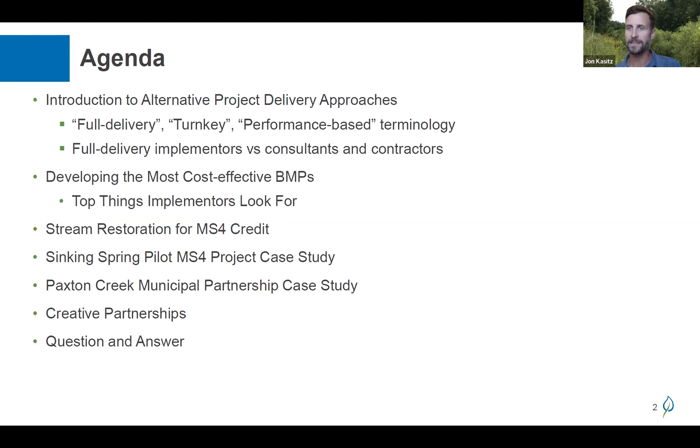So, project delivery methods - again, maybe an atypical place to start this conversation, but when it really comes down to the cost of compliance, this is the way to save money getting MS4 compliance, when factoring in the life cycle of the BMP in the project, and really guaranteeing and fixing the cost of MS4 compliance, ensuring it's as low as possible as folks are procuring or chasing the funding for these projects.

This is starting to happen in Western and Eastern Pennsylvania. It's been around a bit more in the Chesapeake Bay watershed - the idea of stormwater taxes, stormwater fees, stormwater authorities. Folks are starting to really wrap their heads around MS4 being, on a 5-year permit cycle, a multi-million-dollar regulatory compliance burden. Our goal with our customers is to figure out how to satisfy that regulatory compliance burden as cost effectively as possible and reduce risk and liability for the folks who are paying for this work, which is all of us on the call here.

If you're looking at PennDOT and their MS4 permit responsibilities, we're paying for that through our gasoline taxes, through our other state and federal taxes. At a municipal level, I suspect some of you on the call are probably currently paying stormwater fees and stormwater taxes. So if we can collectively as an industry reduce the cost of compliance while getting good projects in the ground, it's really going to benefit all of us in society by reducing the cost of this emerging area of municipal regulatory compliance.

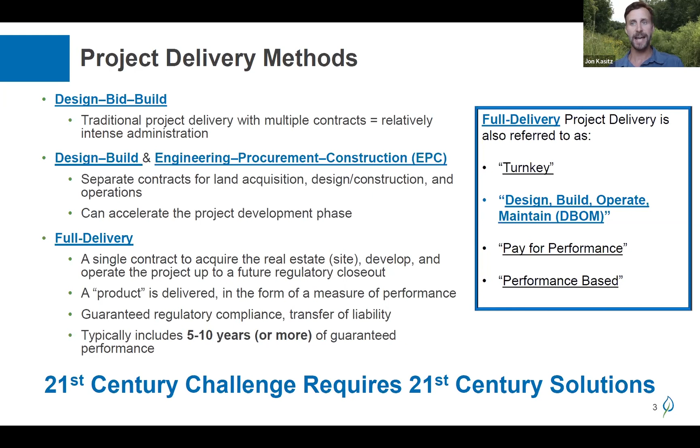So we're not fretting about a storm coming up when I've got a stream restoration project halfway through construction. If that gets blown out, I'm looking at a $100,000 change order to the contractor going through traditional procurement. So not to dwell on this, but that really is, in my opinion, the special sauce to get these projects done to satisfy MS4 compliance as cost effectively as possible.

Are you hiring a consultant to do that? Who's really accountable at the end of the day for this work being done, guaranteeing that's going to get done as cost effectively as possible, and putting themselves on the line to deliver for a fixed upfront cost? This is really what full delivery gets you, from A to Z for a complicated 5 to 10 year long project, with one entity accountable for delivering that at the lowest possible cost. Honestly, if things pop up during construction, it's on that company, on us as the implementer, to figure it out.

I'm always trying to craft how I communicate what we do, but here's a new way of trying this. We as a company have done, I think, over 60 miles of stream restoration, 400 acres of wetland restoration across the state, and literally thousands of acres under active management, conservation, and preservation easements. We've done over $250 million of wetland, stream, and natural resource restoration with zero change orders. And that's pretty cool to be able to say.

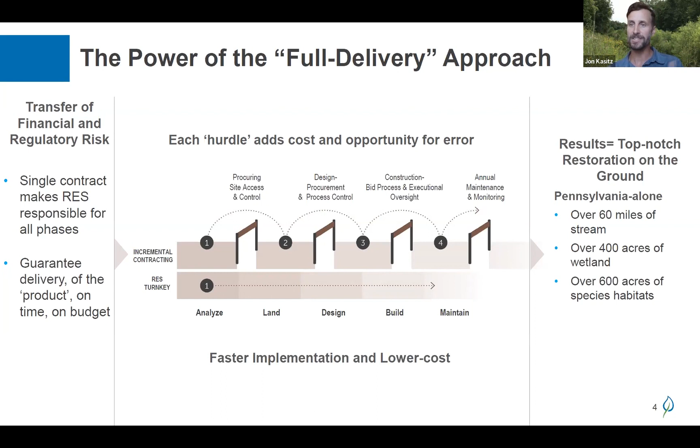Again, this isn't about anything special about Hannah or myself. It's really this full delivery implementation industry that's been the catalyst driving that phenomenal success of getting really good work in the ground, better, faster, and cheaper, by doing it a bit differently through full delivery or design, build, operate, maintain contracting. And this is nothing actually new within the industries we operate in as a company.

In the compensatory mitigation world, the consultants on the call are probably aware of wetland stream mitigation. That's how our company cut our teeth in Pennsylvania, through wetland stream mitigation banking, turnkey offsite mitigation for the Southern Beltway, the Shell Cracker plant, the Pittsburgh International Airport commercial expansions, and PennDOT districts 11, 12, and 10. This is how we cut our teeth doing these stream and wetland restoration projects.

The cool thing was we just took those lessons learned and skill sets, along with external consultants and contractors working with us and for us, and applied that full delivery approach to things like environmental lawsuits, where someone made a mistake during construction and bad stuff happened that impacted wetlands and streams. We can use full delivery to commoditize that into, hey, you need 5, 10, 20, 100 acres of wetland restoration to address that environmental lawsuit or PADEP consent order.

We can put that into fixed unit-based pricing, go find sites, design, build, operate, maintain, and implement, and we're oftentimes on the hook with the regulators to satisfy that litigant's — I'm not an attorney, but maybe the plaintiff is the right term — compliance responsibilities. Obviously, today we're talking mostly about water quality and stormwater offsets.

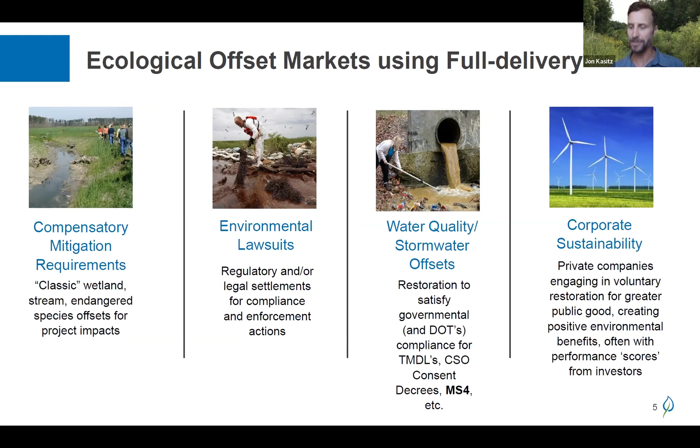Hannah, I'll quickly run through these because you're the technical expert. I am not, but I'll let you take it over with the next slides, and you just give me a heads up or a nod, and I'll click through the next things.

When we have initial conversations with our customers and other stakeholders involved in these MS4 projects, we're often probing a little bit on what you're looking for and what you think you need to satisfy MS4 compliance when trying to find the best potential sites. What's the scope of the work? Are you looking just for a design and engineering firm that can design stream restoration projects? Looking for a construction company? Are you looking for a native plant nursery to provide trees and shrubs and do riparian buffer plantings? All those are good things. So we're often trying to decipher with our customers what's the scope of what you're looking for, and where can we provide the most value.

We're going to talk about public and private land. A lot of folks try to identify projects as quickly as possible. If you're looking at MS4 potential BMPs, stream BMPs, the immediate go-to is, well, where can I find some streams to restore in the township park, the county park, public land? We do projects on public land, and that can work sometimes if they're the best location to do the most cost-effective project. Conversely, maybe you want to consider private land, or really just consider public and private land, with the goal being finding the most cost-effective and sustainable project site that will reduce as much as possible the cost of MS4 compliance.

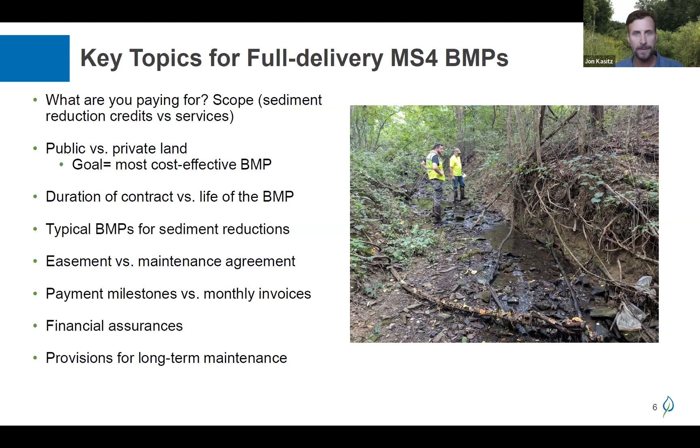So Hannah, I'm going to pitch it over to you, and I'll follow along as you go through, and I'll click through the slides. Sure, yeah. So I'll get into the nitty gritty of how we site these projects and how it's different from other projects.

Not every stream is apples to apples in terms of what is and isn't cost effective, what is a high-producing stream. We have found across the board that stream and floodplain restoration is the most cost effective way to do this if you're looking at substantial needs for reductions.

I won't go through too much of this, but like Jon said, sometimes just because you have a public park with a stream on it doesn't mean that's going to score out to be a good project in terms of the reductions and gain you get. A lot of the typical projects done involve minor bank work or intense armoring to protect buildings and facilities - those either do not count or are unlikely to count for much, so they're not a very cost-effective approach.

Especially since, as Jon went into in depth, this is a project that requires maintenance basically in perpetuity. Stream BMPs are good for that because if they're done correctly with a floodplain approach, they're basically a low to no maintenance system.

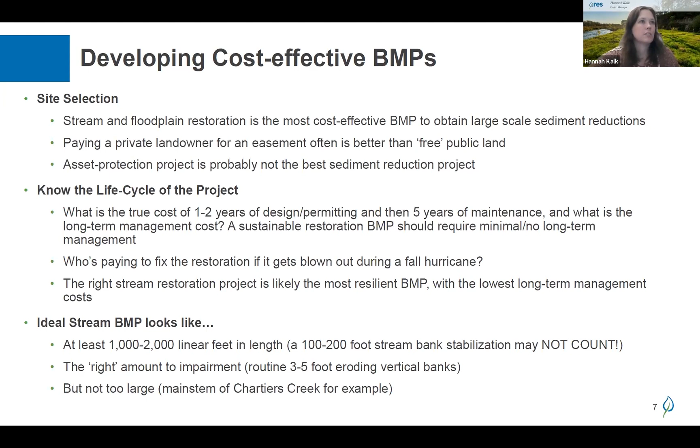Hannah, I think you got yourself on mute. Hey, can you hear me? Yep, good, yeah.

I'll jump into the regulation component of this in a second too.

Got a question from Corey - what size drainage area is typical for your ideal sites? It depends. In urban areas, as you guys know, it can be very difficult to measure drainage area because stormwater is such a huge driver. We like to keep it under a square mile in terms of the cheapest builds, but that being said, if you've got a really, really good site, there can be benefits to working on larger streams too.

So the biggest thing is knowing the regulations behind what is and isn't creditable with the Clean Water Bureau, DEP. There are many different variables, different approaches to calculating your original loading requirements, and that plays into different approaches to calculating your credit or benefit from a site. I'll go into these next.

John, if you want to go to the next slide. And Hannah, I'll go to the next slide here in a minute, but just quickly - what is the right team for the entire project life cycle?

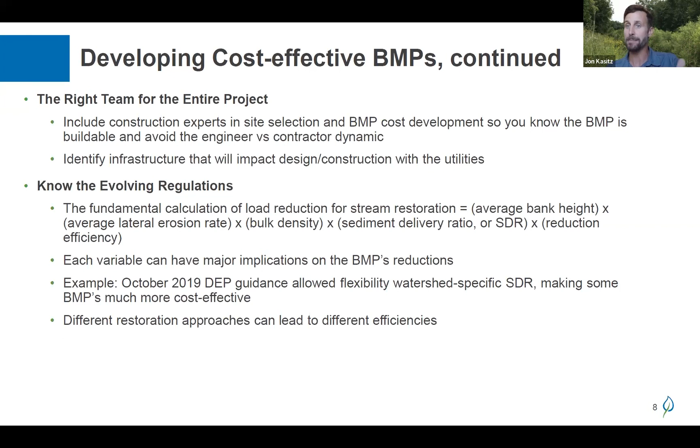In terms of a little bit of background on the regulatory framework, most of you, it sounds like, are with municipalities or work regularly with municipalities. Any MS4 permit holder in PA within the Chesapeake Bay or within an impaired water with a TMDL has sediment reduction goals or pollutant reduction goals, nitrogen and phosphorus.

So as a component of your pollutant reduction planning, you have existing loading calculations that you have to do to determine what the goal for the permit cycle will be, and that's kind of step one in determining how you site a stream BMP.

So I think that's just a point we wanted to raise, is that when you start thinking about this as an option, you need to take a look at how your loading counts were done.

If you use the simplified method, which is a little less work up front, you're being directed by Clean Water Bureau to use the Chesapeake Bay Expert Panel Protocols, which are methods and guidance documents for determining site-specific loading. So you actually have to get more data on the back end about your BMP you're proposing. But it also helps guide you through what kind of credit this particular site could provide.

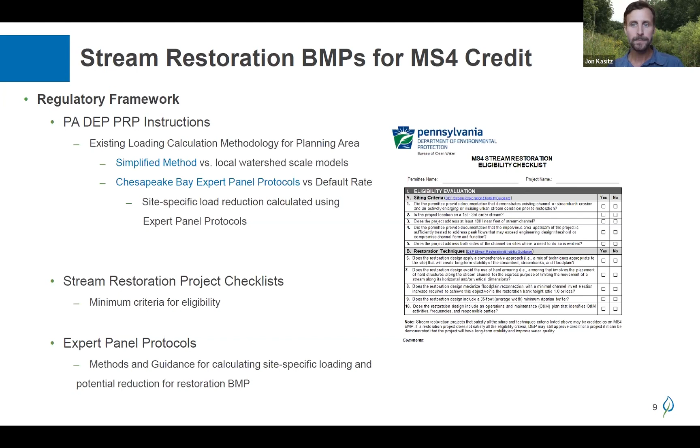Yeah, so I'm going to dive into, hopefully it's not too boring, a little nitty-gritty on the expert panel protocols. There are a series of these protocols that have been published, and they continue to update them, that provide guidance specific to the Chesapeake Bay, but they're also being applied in Pennsylvania outside of the Chesapeake Bay, to help you determine the site-specific loading. So the exact amount of material, an estimate of the exact amount of material coming off a site annually as a result of erosion, but then also to determine what credit the site should have for whatever your pollutant of concern is.

And so there's a number of them. We'll focus on protocol 1 today because that's the one that's really sensitive to how you pick your sites and where you pick them. And that is aimed at direct stabilization of sediment from in-stream sources, so eroding banks.

When you're trying to find a good MS4 site, it's got to be a bad stream - I interchange good and bad. So what you're looking for is over-widened, deeply incised, ideally in that sort of higher range of drainage area in your watershed. You want it to have very little bank protection. You don't want it to be well vegetated. You need to be able to document active erosion on the site.

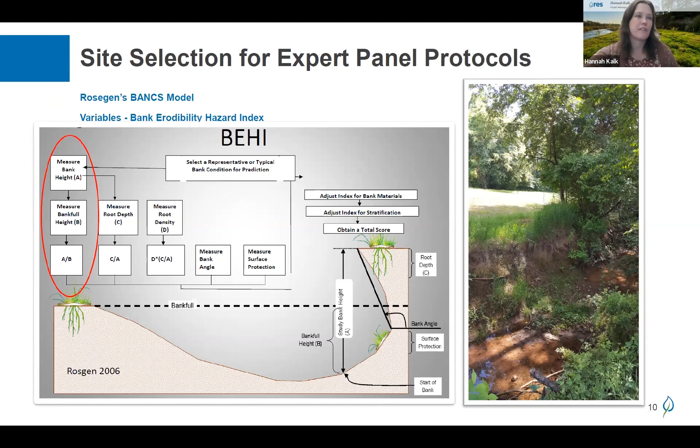The other variable when you're trying to come up with those erosion rates is near bank stress, which is effectively which bank is getting the stress in a bankfull flooding event. Ideally, you want your thalweg, the deepest part of your stream, to be right in the center, so that you don't have any water attacking your banks. But most of the streams that you're looking at, you're going to have one bank or the other as you get these super highly eroded areas with all the near bank stress. So there's different methods for looking at that. You've got to be sure whoever you have doing this work is qualified and familiar with the protocols.

I think the quick analogy I'll use here is you don't have to do all this effort on the front end to assess these potential BMP locations. But again, in our experience, being the ones on the hook to deliver 1 million pounds of sediment reduction for $1.95 a pound for the next 5 to 10, 15 years, we have to do these to really develop cost-effective projects that we can kind of guarantee we can do. And the quick analogy is, sometimes it makes a heck of a lot of sense to spend a nickel to save a dollar.

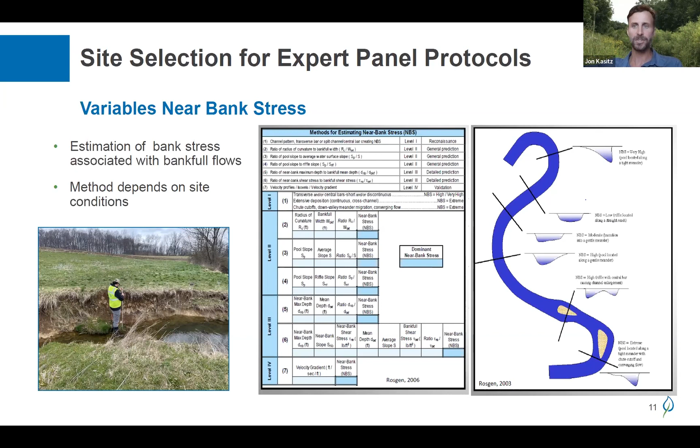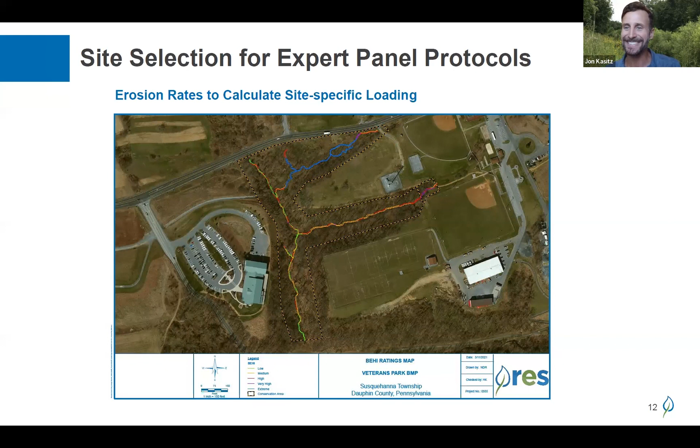And you have to be able to provide this level of documentation if you're going to be requesting credit above a certain efficiency. So this is standard for what we would recommend - if you're going to do the work, you should get credit for it.

If you're really interested, there are all of these checklist documents for the expert panel protocols. If you're going to try and show eligibility under the different protocols, you have to jump through the hoops to provide the adequate documentation to do that. So what that means is a lot of data up front and a lot of data on the back end. But if you do that, then you can actually claim above the standard efficiency. So typically, you would only be able to claim 50% efficiency.

And so there's pros and cons to doing this. If you don't have to, and you're happy with 115 pounds per foot, and you don't have a substantial need, then you can go that route with a normal eligibility checklist. But this is definitely the way to go for anybody in the other camp.

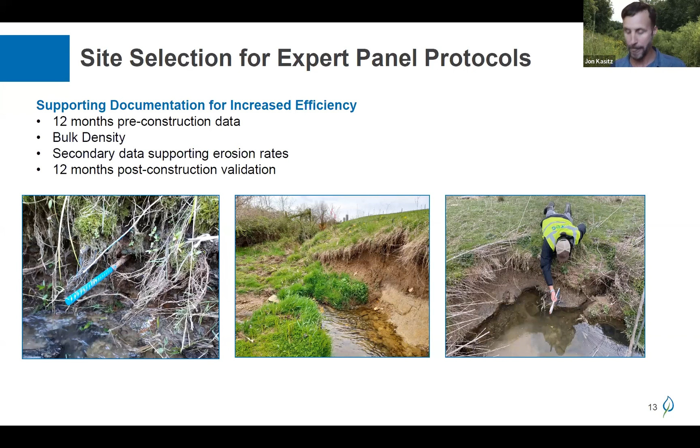All right, what are we talking about doing? Some of you are probably familiar with natural channel design. Some of you may know this by other names - we call it floodplain restoration. The DEP calls it legacy sediment removal projects. What we propose to do is tear off the Band-Aid and fix the source of the impairment. So we're looking for streams impaired by legacy sediments - essentially valleys filled in with sediment after all the trees were cut and the soil washed down.

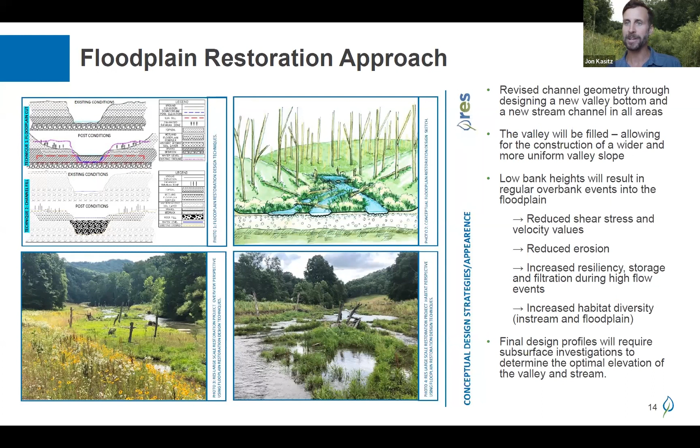Obviously the picture here in the valley is in southwestern Washington County. If everyone had this much room to work within, it'd probably be really easy for engineers to design these projects through floodplain restoration. We all have to live with the site constraints within these project sites, existing utilities. Our sites in the Harrisburg area, we've got some leaking sewers contributing excess nutrients to our wetlands, that the wetlands are also kind of sucking up. So there's all of that stuff that has to get factored into the design process, but really, especially in the site selection process, to see which design approach will work at that particular location to generate the most pounds of sediment reduction.

So I'm going to, how about we pause here? Is there any Q&A we want to address right now before we dive into some more? Yeah, there are several questions, Jon, if we want to. How about we'll start at the bottom? Maybe I'll address Barbara's questions first.

Do we work on brownfield sites? Yes, maybe sometimes. If you're working on a contaminated site, you've now got a new dilemma of what to do with contaminated material, working in and around and dealing with it. That can make things more expensive than an HOA subdivision's natural stream or the ag field type stream restoration projects. So definitely can, however, you need to factor in what the additional cost is if there's potential contaminants, again, keeping your staff safe from an EHS standpoint during construction. Do you use HAZWOPER training because you're dealing with contaminated materials? So it definitely can be considered, but it brings some other liabilities, and liabilities are cost.

What we work with, we don't actually physically work for the Southwestern Pennsylvania Commission. This is just kind of a training opportunity with SPC. I'm not sure that really answers your question, but we certainly work with all kinds of individuals, universities. We've had some really neat collaborative case studies.

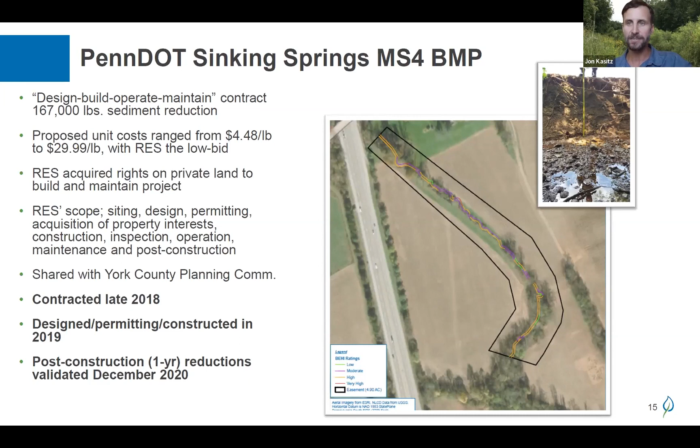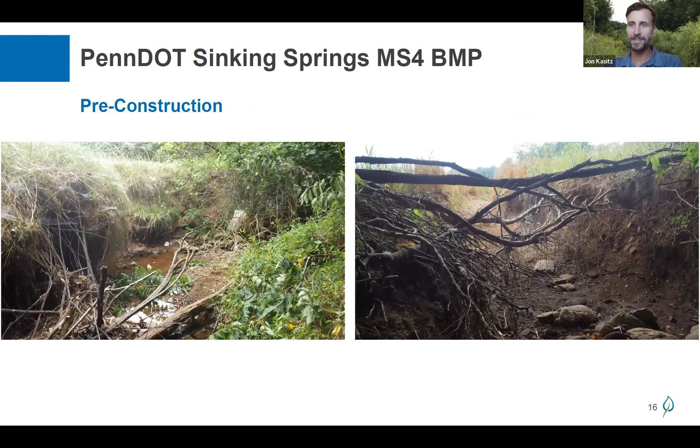Pre-construction, these are very similar impaired Pennsylvania streams, with 2, 3, 4 foot high vertical eroding banks contributing hundreds of thousands of pounds of sediment. Those eroding stream banks are the source of impairment, the pollutant we're really trying to address with all these methodologies that Hannah described.

You take that 2 to 4 foot high raw eroding stream bank, and post-construction there's a 2 to 3 inch high stream bank with E&S matting and stabilization grasses. By April 2020, four months later in the first growing season, those 2 to 4 foot high raw eroding banks are now 1 to 2 inches and fully vegetated. You've removed all of that sediment loading potential from the landscape. That's where the sediment reduction comes from—removing the stream banks and the opportunity for stream bank erosion within the project footprint.

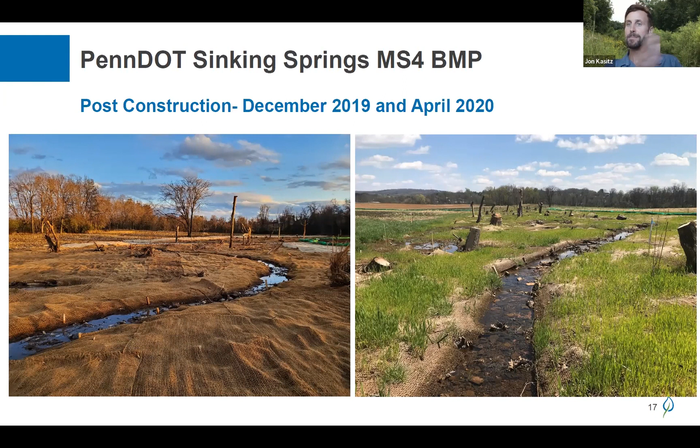Immediately post-construction, then four months later, then a year later, the wetland trees are really growing in and becoming more established. These banks have nothing left to erode. Using pre- and post-construction data and BEHI data collection, the sediment reduction efficiency at this location was over 99%, because you went from raw eroding banks to basically zero stream banks, all fully vegetated.

The picture on the right is just after a hurricane came through in September 2021. That's I-83 in the background, a major stormwater contributor to the top of this project site. A few days after that storm, zero damage. We take these things seriously too—if a site is damaged, we're out there fixing it on our own dime.

So there's a lot of good work in the ground that gives us confidence we build it one time and we're not coming back to build it again. I didn't get a picture from this year—I'll need to get one for my next presentation.

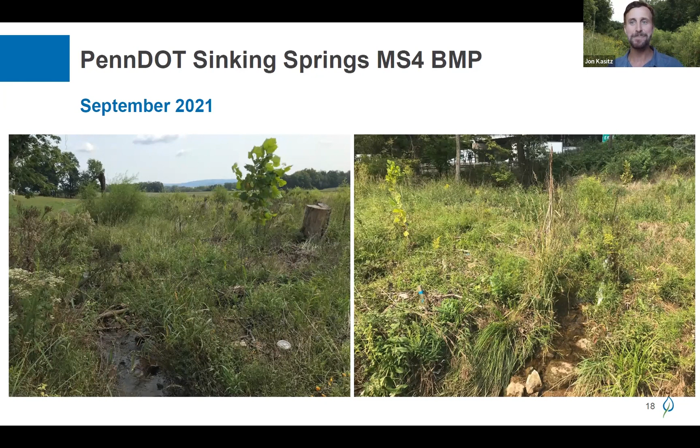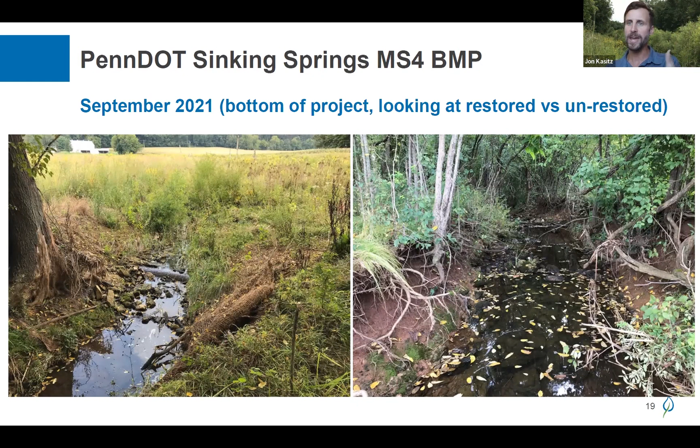This is the very bottom of that restoration project, looking upstream on the left into beautiful lush wetlands, then turning around to look directly downstream at unrestored stream, which is what the majority of this project looked like originally. Hannah and our team are actually working on a permit application right now to complete the restoration downstream, building out the rest of the project, which will include almost a mile of stream restoration. That portion isn't an MS4 BMP—we're doing it for another customer who needs a wetland stream restoration project, but it lets us co-locate multiple projects at one location and maximize the watershed benefits.

Another unique PennDOT-led opportunity starts to tap into municipal partnerships. Paxton Creek includes several municipalities, but the majority is in Lower Paxton Township and Susquehanna Township, draining to the City of Harrisburg, where Capital Region Water is the local utility running their MS4 program. Those three municipalities, with HRG as their consultant, deserve credit for good planning—they had already developed a joint PRP to collaborate, share resources, and share the implementation of projects.

It'd be hard to quantify the financial benefit of those three entities banding together under a joint PRP, but it probably is in the hundreds of thousands, if not millions of dollars over the long term by collaborating together at the outset, just with those three municipalities.

The really cool thing was they layered PennDOT on top of that as a fourth partner on this project. Again, competitively bid, we got 3 or 4 bids from folks like ourselves, ranging from $3.49 a pound to $12.77 a pound. Our first bid was $4.48 a pound. We sharpen our pencil, we learn, we know how to do this stuff better, and we're now down to $3.49 a pound. This is what competition does amongst qualified entities, it drives down costs for everyone as folks like us really need to get more competitive as we're looking for project sites to implement.

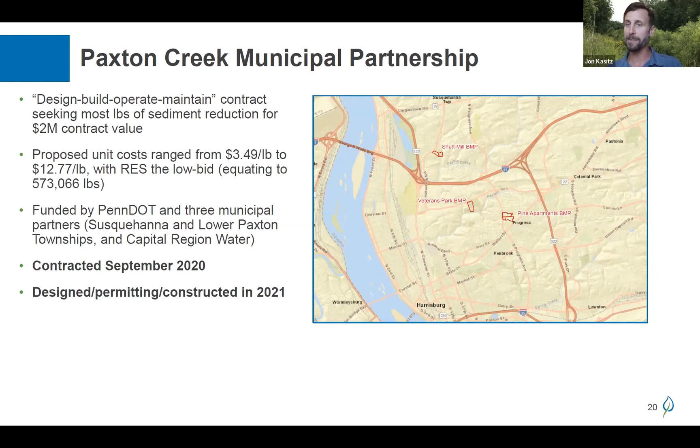So all 4 different partners involved. Again, a really cool story. Contract in place September 2020. Permit applications were probably submitted late 2020, early 2021. 3 different BMPs, 2 of them were in one township, the other BMP was in a third township. All 3 BMPs permitted and constructed in 2021.

From a land standpoint, one of the BMPs was actually an identified BMP within that joint PRP I mentioned. We looked at dozens, 50 plus different locations. We spent a lot of time - spend a nickel to save a dollar - assessing potential restoration projects. Lo and behold, one of the ones identified by a qualified engineering firm turned out to be a dang good project site, and it's one we rolled into that contract.

One of the BMPs was on a private HOA apartment complex, had the right size stream, the right attributes to be a cost-effective BMP. Then the largest BMP was an interesting one, partially on a township park. The stream then drained into state-owned property, and we executed an agreement with DGS, and maybe Fish and Boat Commission, because their office is literally right there - that parking lot on the right-hand side is the Fish and Boat Commission's office.

Aggregating all 3 projects under one contract, if you sliced and diced the dollars per pound, the 2 smaller BMPs were a lot higher than $3.49, while the one large BMP, from a volume savings efficiency standpoint, was lower. They all balanced in at $3.49 a pound, our contractual obligation. Bundling more things into larger projects and contracts allows you to take advantage of volume efficiencies and savings. But this was actually the first time in our experience that several municipal partners collaborated with PennDOT doing the procurement, with all 4 partners contributing financially to the project, and all 4 equally sharing the sediment reduction benefits and the credit.

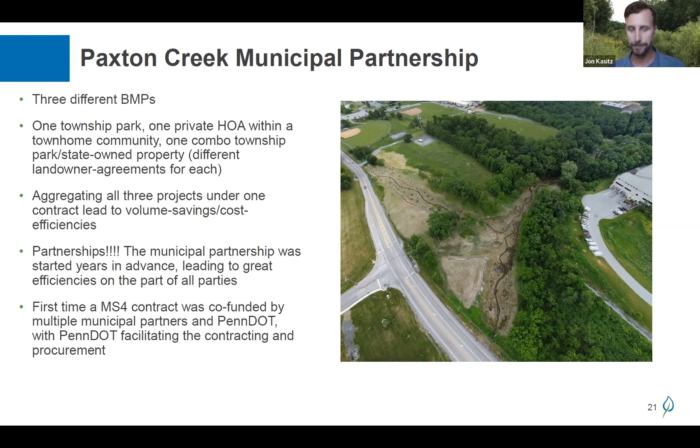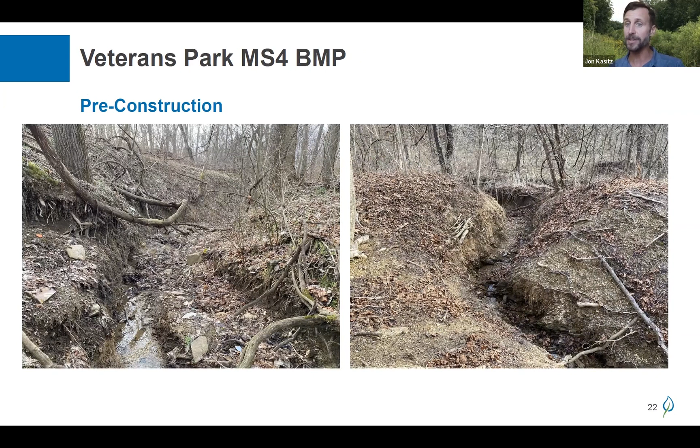So pre-construction, you guys probably all have many similar looking, unfortunately beat up streams within your township parks, within your HOAs, maybe on your own properties. Obviously they look worse this time of year in the wintertime when you can really see the level of impairment. But pre-restoration, this was the Veterans Park BMP, township park, state-owned land.

This spring, in May or June timeframe, you folks on the call may not have seen the press release, but the governor of Pennsylvania, Tom Wolf, introduced Pennsylvania's first Native Species Day, to commemorate the value of native species and habitat biodiversity. They used this project site as the case study for good projects that have co-benefits, including the increase of biodiversity and habitat diversity within our communities, and all the other benefits that come with that from a social health, social justice standpoint - accessibility to nature, biodiversity for pollinators, bugs, bees, the things that produce the food we need to eat. So there can be a lot of really neat co-benefits of these projects if they're designed, sited, and well thought through prior to implementation.

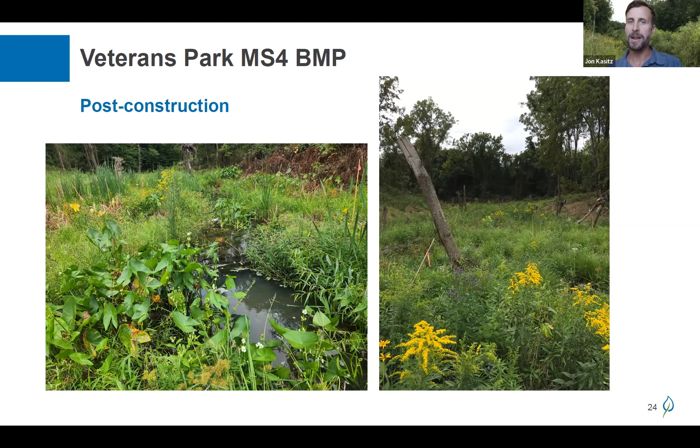This is something we deal with a lot. Just because an area is forested doesn't mean it doesn't have sediment loading and impairment, as well as restoration potential. I like this picture because it's a good visual - this is a larger stream, but the tree right behind the gentleman hanging over a 4 to 5 foot high eroding bank is the same tree that's now in the stream one year later. Think of the thousands of pounds of sediment coming off just that one stream bank - that's the source of sediment loading and pollution.

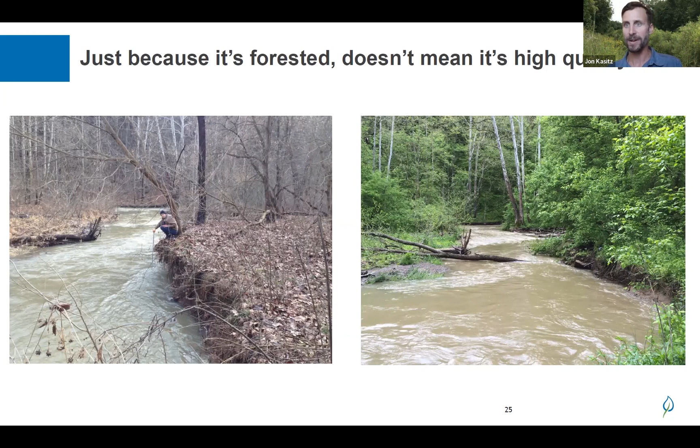Here's another visual in a forested setting - this was a larger stream reach in Western Pennsylvania. A farmer had pushed the stream towards the valley wall, causing active sedimentation on the left-hand bank. We moved that stream back into the middle of the valley, taking those 2 to 3 foot high raw eroding stream banks and, post restoration within one growing season, brought them down to 2 to 3 inches, entirely vegetated - no sediment coming off those banks on a larger stream reach.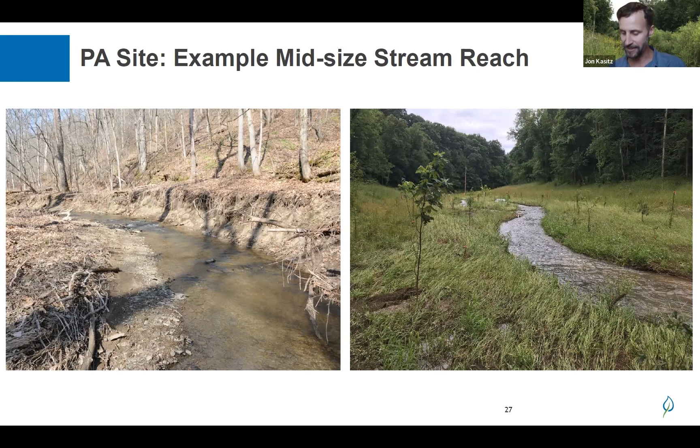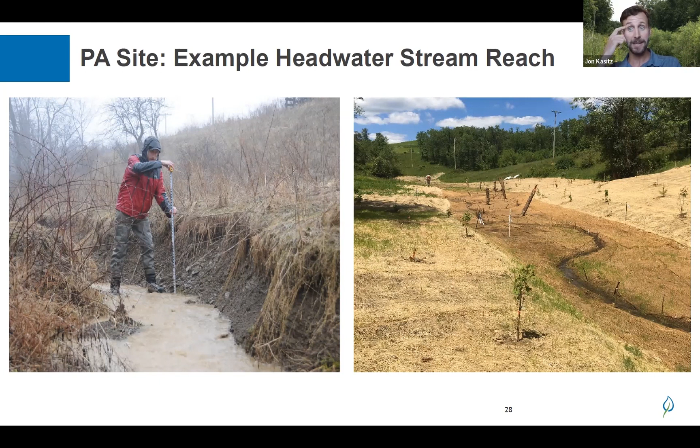Creative partnerships - I think we're getting towards the tail end here and we have some time for Q&A. Full disclosure, we are not a municipal engineering firm, we are not planners. There are a ton of great folks on the call doing municipal engineering, planning work, developing PRPs, identifying project sites. That's just not what we do, but we acknowledge folks are out there doing that good work. One of the goals is, how do we find money to pay for these projects to get them in the ground? It feels like one more regulatory burden - an unfunded mandate, as we often hear from municipal customers, pushed on them by the DEP and EPA and the government, and how do we pay for this?

PennDOT can be a potentially attractive partner to bring into the fold. We're not here to overstate the amount of partnership potential with PennDOT, but you all probably know your local PennDOT districts - they have the biggest MS4 permit responsibilities in the entire state. They're doing design, build, operate, maintain contracting, so there may be a creative partnership opportunity. We have a contract with PennDOT in the Chesapeake Bay - a call out to all the engineers and folks living there. We can roll new additional BMPs onto our existing contract through this design, build, operate, maintain approach, where PennDOT does the procurement. You're not even paying us as a company - you give the money to PennDOT, and PennDOT facilitates the project on your behalf, getting good work in the ground pretty quickly through that innovative opportunity.

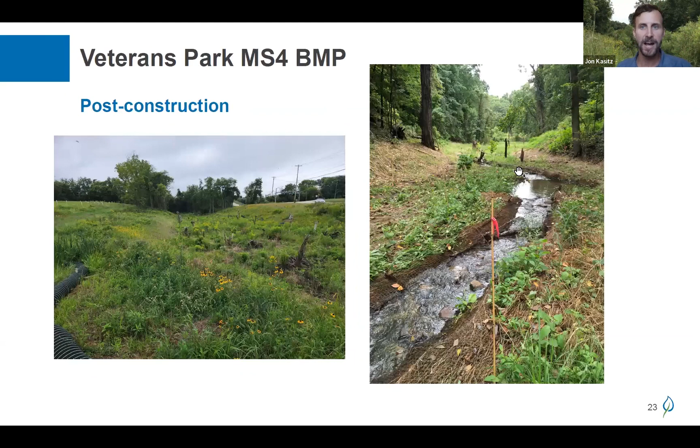I'll give you a real nice visual, because that's a big dollar amount for these projects, especially this floodplain restoration, legacy sediment approach. Let me go back to the very first slide to answer Beth's question - let me see if I can share or draw.

The excess sediment went right here and right here. So we end up having to find the closest location, so we're not hauling sediment on the road and disposing of it at a landfill or some other location in the watershed. If we can't hide the soil somewhere on site, it kind of breaks down our cost efficiencies. So we often end up finding other locations on the same property.

Now, legacy sediment - the sediment we're removing from the floodplain probably washed into it from the adjacent fields. These are relatively low gradient areas, though there's some topography coming down into this area. The sediment we put back in those adjacent fields, that's where it came from over the past 20, or past 100, 200 years, due to a lack of stormwater management at these locations.

So as a company we've had to get very creative to figure out where to hide that soil on site so we don't end up with a mountain. Funny example - I work with the Pennsylvania Turnpike Commission a lot. If you've been on the Turnpike, you've probably seen several new mountains off their various interchanges. That's because they couldn't afford to put the soil generated from their construction project somewhere else. We have the exact same challenge, and it requires a lot of creativity.